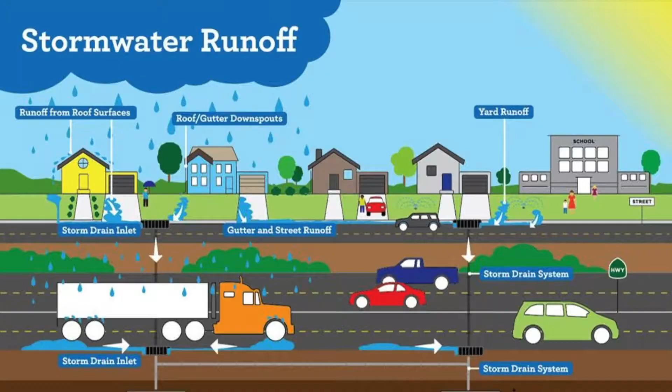Today, this NPDES program requires states to administer an MS4 program to cities, counties, and other local government units who own and operate a storm sewer network, or the Municipal Separate Storm Sewer System, MS4. The MS4 includes all curb and gutter, catch basins, sumps, storm pipes, and stormwater basins in the city. It even covers operations of our stockpiles, pet waste, and winter salting activities.

The main goal of the program is only rain down the drain. This program is really all-encompassing and it requires teamwork across all departments to implement the requirements of the MS4 permit.

In summary, the goal of the MS4 program is to ensure stormwater utilities are functioning and maintained. This is done through inspections and cleanout activities. To ensure construction projects manage stormwater during and after, this is through erosion control inspections, stabilizing our soils, and our stormwater ponds.

To help protect and improve water quality, this is through illicit discharge detection, the only rain down the drain program, street sweeping activities, and our water quality improvement projects.

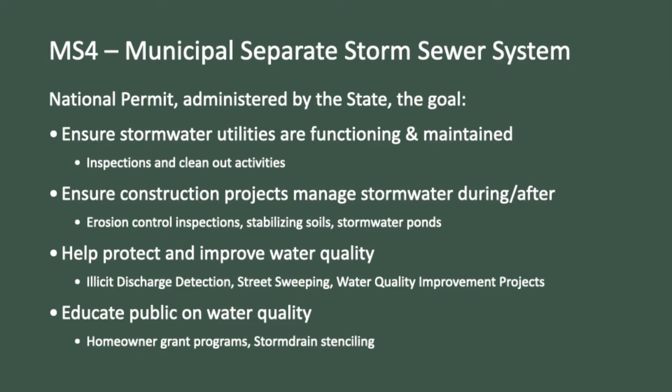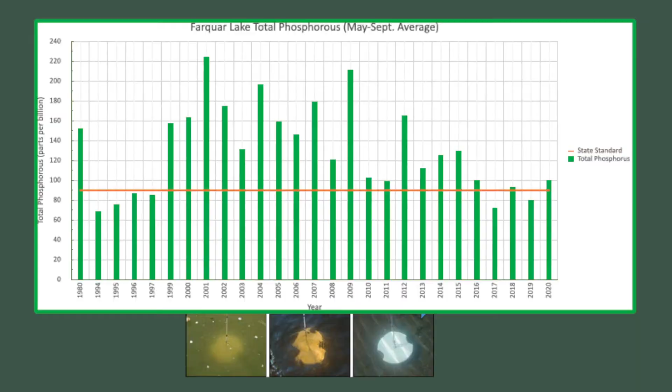And lastly, we like to educate the public on water quality. We do this through homeowner programs, storm drain stenciling, those sorts of things. It's through implementing these best practices we really can have an impact on our water quality. Here we have a graph of Farquar Lake and the improving water quality that we've seen over time.

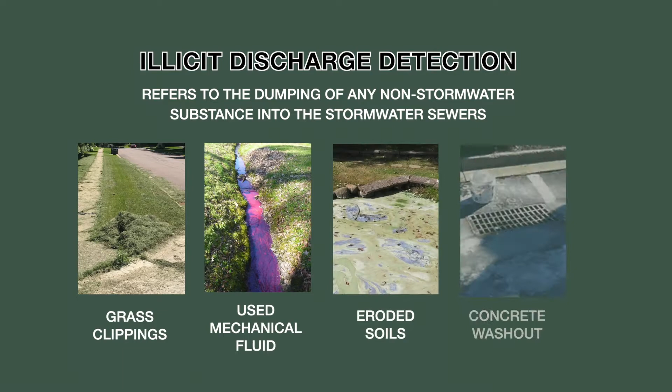So now we're going to be talking about illicit discharge. Sounds interesting, right? Illicit discharge refers to the dumping of any non-stormwater substance into the storm sewer system. This includes grass clippings, used mechanical fluids, eroded soils, concrete washout, and can also include the unlawful connection of a sanitary pipe to a stormwater pipe.

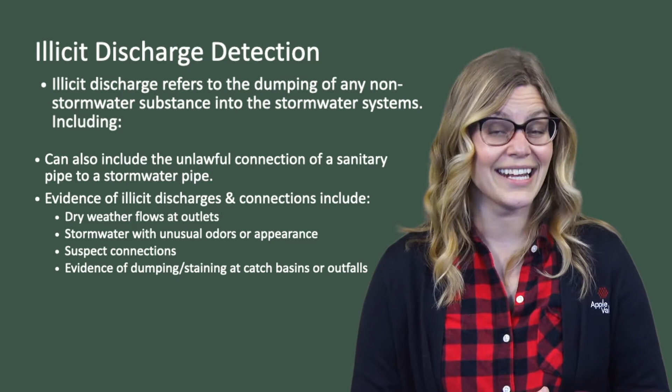So when you're out in the field, evidence of illicit discharges and connections can include looking for dry weather flows at outlets, stormwater with unusual odors or appearance, suspect connections, any evidence of dumping or staining at catch basins or outfalls. So when you're out in the field, your responsibilities will include reporting on these things.

For emergencies, we want you to call 911. Fire also has hazmat training, and fire can handle these ongoing spills with their equipment. They will call in other departments if needed.

Now, during business hours, you're going to want to call utilities. So that's at 952-953-2400. They will also pull in other divisions as needed, and they'll contact the Minnesota duty officer if need be.

These are going to be emergency situations where we've got oil going directly into the lake, or we've got a lot of harmful substances being poured into the catch basin. Those are examples when we want to call the Minnesota duty officer.

Now, if you're seeing some harmless solid substances from residents, such as grass clippings, you can go ahead and call code enforcement or reach out to natural resource staff.

Now, during non-business hours, say you catch something, you're going to want to call dispatch, and that's at 952-322-2323. Dispatch will call the on-call person to get them to come and help.

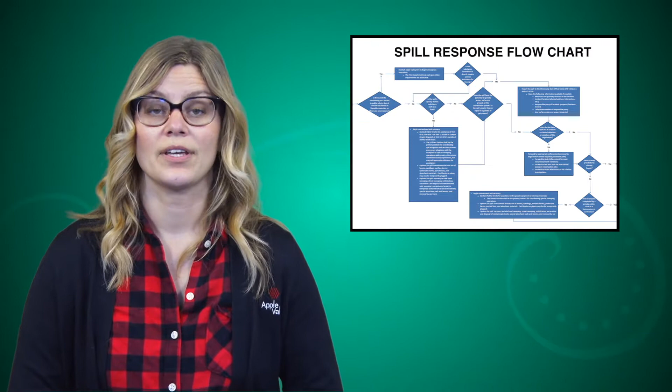Now, if you're sitting there, you've made the call, we really want you to contain those spills if you can while help arrives. Staff have also created a flow chart of illicit discharges, and so we recommend that you bookmark that on your iPad. All illicit discharges must be reported annually as part of the MS4 permit, so make sure you're reporting that information to the appropriate staff.

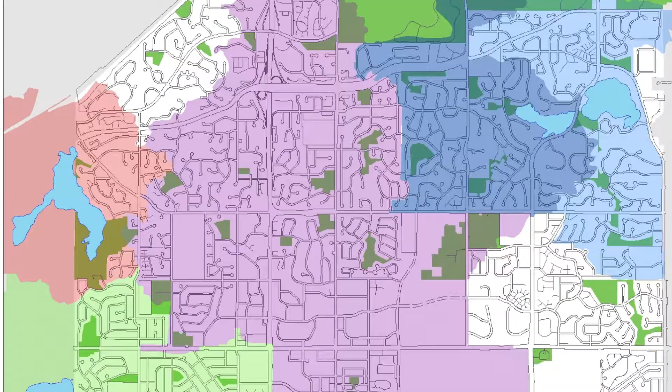The City of Apple Valley has many lakes that are listed as impaired, meaning they are not meeting state water quality standards. Studies known as TMDLs, or Total Maximum Daily Loads, identify sources of pollutants and assign specific pollutant allocations, or waste load allocations, to contributing MS4 permit holders such as cities and counties.

For example, the city needs to reduce an additional 18.4 annual pounds of phosphorus in Lake Alimagnet in order to meet our TMDL goals.

This is actually a 55% reduction in our initial allocation of 30.8 pounds. That's good progress through projects we've installed that have helped reduce the amount of phosphorus entering into Alimagnet Lake.

Measuring water quality plays an important role in managing our lakes and ponds as part of our MS4 system. Natural Resources staff measure different water quality parameters to observe trends in water quality and to determine the effectiveness of water quality improvement projects, such as stormwater ponds and structural pollution devices, or SUMPs, installed by the city.

Parameter measures include water clarity, which is measured with a Secchi disc; total phosphorus, the amount of nutrients in the water; dissolved phosphorus, the amount of nutrients absorbed in the water; chlorophyll A, the level of algae in the water; dissolved oxygen, how much oxygen is in the water; and chloride.

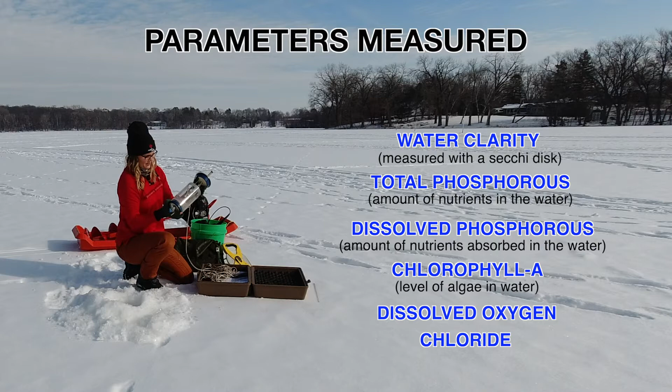Added nutrients from leaves, grass clippings, and pet waste contribute to algal blooms and decrease water quality and recreational activities. This is why activities such as street sweeping and maintaining our sumps and ponds are an important and effective way to improve and protect water quality.

So today we will be taking some chloride samples, and in order to do that, we utilize what's called a Kemmerer bottle. This allows us to take samples at different depths.

First I will be taking a deep water sample. So what we do is just submerge this down. With chloride samples, we want to take two samples, one towards the bottom of the lake and then one towards the surface of the lake. So we just lower this down.

We've got a knot, I'll just do it. Then we use this messenger to send it down, and it actually closes the bottle for us so that we can collect the sample at the depth that we want. So if that went well, we should be able to get our sample. You can see it's coming out here. Open this up. And then we've got our sample at the depth that we want.

Chloride from de-icing salts and water softeners are becoming a big concern for Minnesota lakes. Chloride can negatively affect wildlife and the water chemistry of the lake. Plus, once it's in the water, it's nearly impossible to remove.

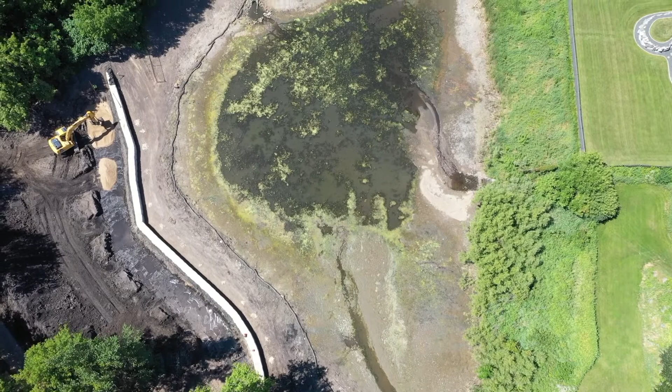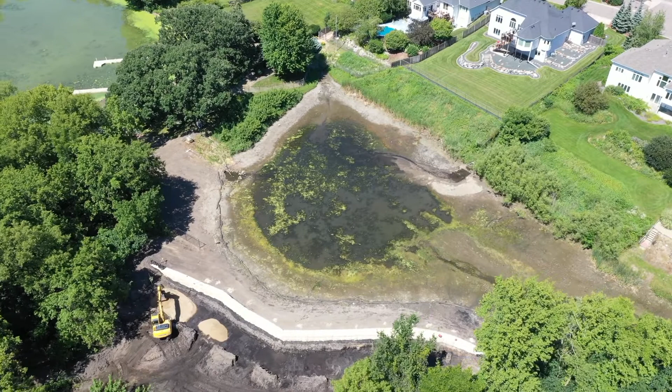A recent example, installed in 2018, is an iron-enhanced sand filter that was installed in Sunset Park, just upstream of Lake Alimagnet. This special iron-enhanced sand actually binds with dissolved phosphorus in the water to remove nutrients before reaching the lake.

Staff actually measured the effectiveness of the system by taking samples of the untreated water and the water treated by the iron-enhanced sand. We know it's working as designed when the nutrient levels are reduced after they flow through the filter.

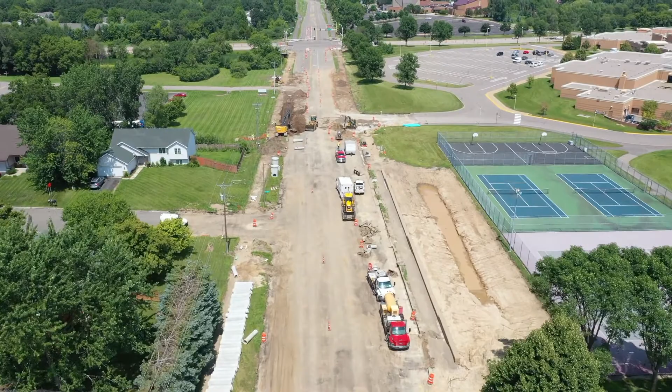Other recent projects include a Long Lake Park iron-enhanced sand filter, stormwater basins installed along Johnny Cake Ridge Road, and the expanded pond at Redwood Park. All these projects were funded through Minnesota's Clean Water Fund, which is part of the Clean Water Land and Legacy Amendment passed in 2008. These projects wouldn't be possible without good planning and partners, such as the Vermillion River Watershed.

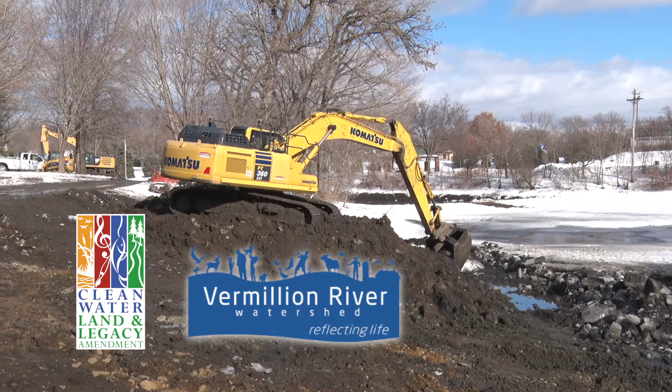We are grateful to utilize these resources when we try to get these projects installed and as we try to meet these water quality goals.

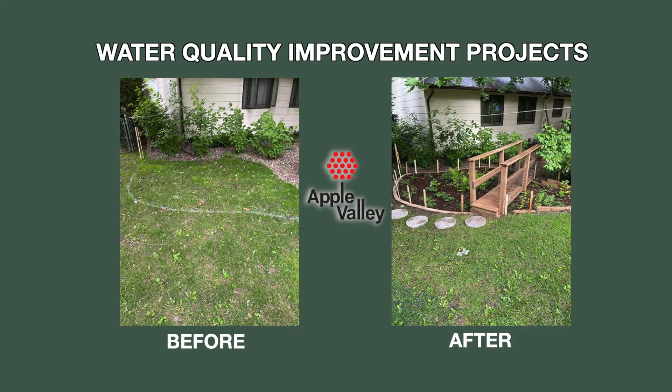In addition to our city projects, the city offers grants to landowners interested in installing water quality improvement projects such as rain gardens, native gardens, or shoreline stabilization projects. This is through our Rainwater Rewards program.

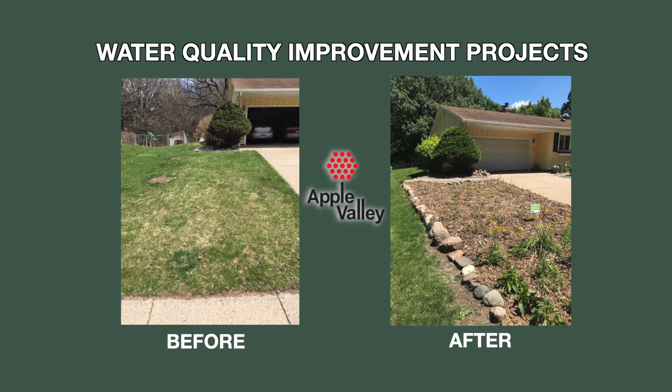Native plants utilized in these projects have long root structures that help encourage infiltration into the soil and provide habitat to our pollinator friends, while also helping to stabilize slopes. The city utilizes buffers around our stormwater ponds because of these benefits.

To manage our city's MS4, everyone, including residents, plays an important role. We thank you for your commitment in helping keep our city great and improving the water quality in our area lakes. None of it would be possible without you. If you have any questions, please don't hesitate to reach out. We know this is a lot of information.

Hello everyone, I'm Mike Endres, the Park Superintendent for Apple Valley. The following is a presentation covering the National Pollutant Discharge Elimination System, or NPDES, as it pertains to the park system. I'll address turf maintenance, dog waste signs, our pesticide and herbicide program, the fertilize program, and stockpiles.

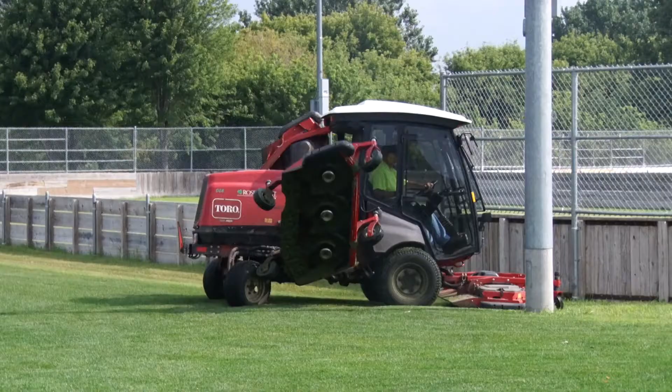Currently, we mow 400 acres of grass. We keep the mower settings at 2.5 inches or higher. Keeping the settings higher means the individual blades of grass have more surface area. This gives the plant a higher rate of photosynthesis, resulting in a healthier plant and root system, also protecting the crown of the plant and giving it better filter capabilities. An additional benefit is the thick, lush lawn crowds out weeds.

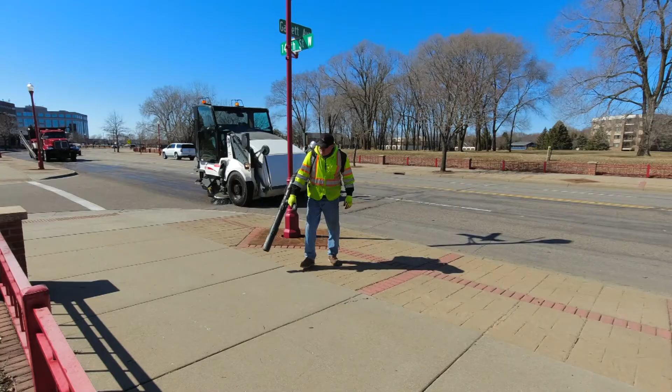We continue to blow off the grass clippings from hard surfaces, keeping them from washing into the catch basins and getting into the holding ponds. This should be an ongoing practice for individual homeowners as well.

We daily clean off mower decks, keeping any residual clippings from getting onto the hard surface areas. The clippings themselves are a benefit to the existing stand of grass. The composting clippings break down, providing nitrogen, potassium, and phosphorus. The key is to mow often, preventing clumping. Sharpening mower blades often also is a benefit to keep the turf healthy. It helps prevent damage to the individual blades of grass with a clean cut, not creating a shredding effect.

Currently, we have pick up after your pet waste signs at Hayes, Belmont, Greenleaf, Faith, Diamond Path, Cobblestone, and Cedar Isles. The key to the success of this program is for the general public to be active participants and follow the ordinance.

Currently, we have 5 staff that have certified pesticide applicators licenses. Our application of pesticide is very minimal. In the past couple of years, there has been a lot of hype to treat for Japanese beetles. We've treated some trees in the past and found it didn't seem to make any difference. Now we have learned that it's not worth the treatment because the trees can withstand the infestation and don't run the risk of killing pollinators.

Our herbicide program is contracted out for weed control. 95% of the system is covered by the contract. We will spot apply in areas not covered in the program only if needed. We do apply preen to some of our plant beds to control weeds.

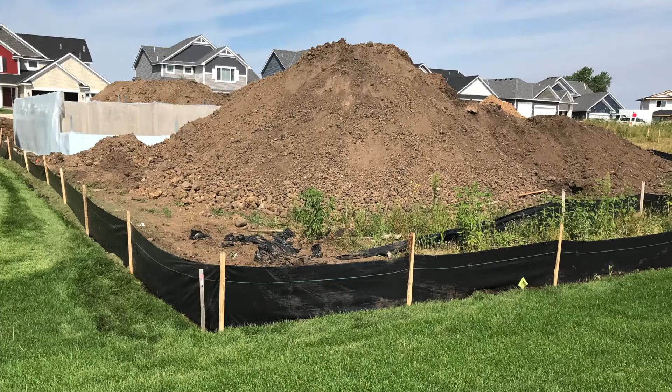Next would be diversion. Can we divert the flow of water around open soil or stockpiles so that erosion never occurs? After this, we have cover.

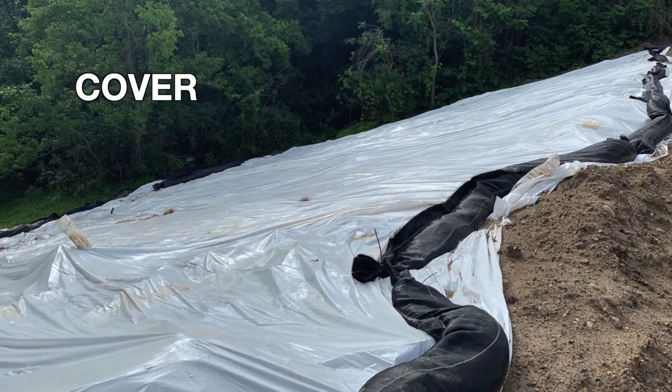Every permit I issue states that stockpiles should be covered when not in use, with a tarp or straw. Temporary stabilization is also a good method of cover, such as winter barley or straw.

My next method would be contain. We can keep materials out of the storm drain by installing inlet protection devices, and we can also contain loose sediment by installing perimeter controls such as silt fence and biologs to keep sediment on the project site. So next we have slow.

We can slow sediment down with rock checks and hay bales. This is for areas where we know there's going to be some sort of flow from the site.

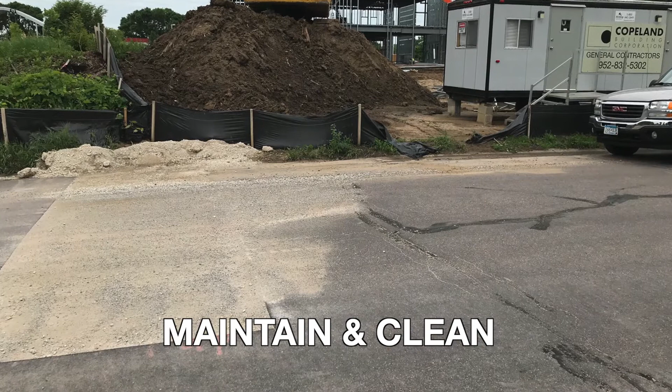Following, we have maintain and clean. This is one of the most important and often overlooked aspects of erosion and sediment control. Once these best management practices are in place, we need to continually check to make sure that inlet protection devices are emptied when half full and silt fence or biologs are repaired when needed.

And finally, we've got stabilize. Once the earthwork has been completed in the project area, the bare soil should be stabilized either with straw blankets, hydro mulch, or sod. 70% of cover needs to be established to meet these minimum requirements.

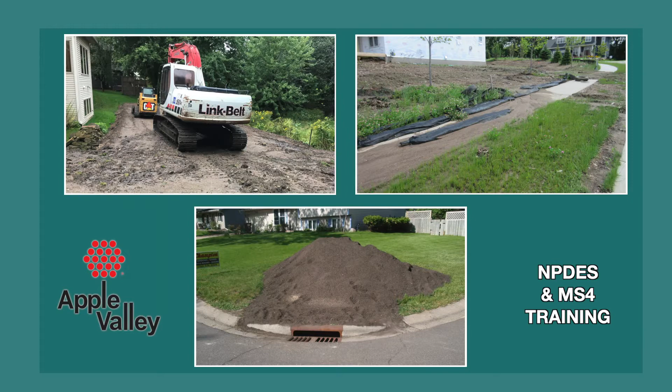So in conclusion, if you see any problems when you're out driving around, any track out or silt fence down, bare stockpiles next to a catch basin, feel free to give me a call. I'm at 952-953-2464.

Hi, I'm Jeff Wright and I work for the Fleet and Building Maintenance Division. I'm here to talk about the city's spill reduction and response plan.

The city has a spill reduction and response plan implemented, which consists of spill kits, floor dry, along with preventive maintenance for all our equipment. The spill kits include Hazorb rags, Hazorb pillows, and Hazorb snakes to help dam up and absorb the spills and keep it from running down the curb gutters to a catch basin.

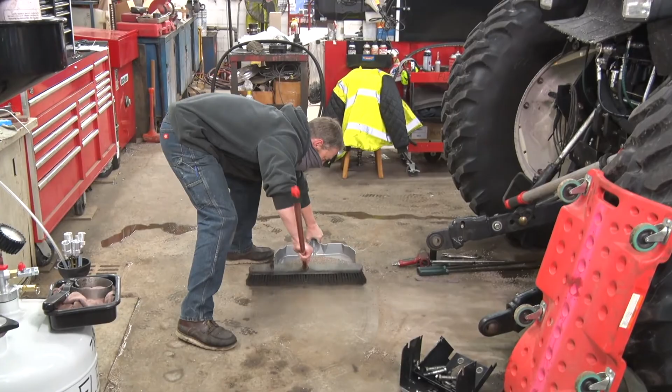The floor dry is another way to help absorb and clean up spills on the roads and the shops. When used, always make sure and sweep up the floor dry and bring it back to the shop and dispose of it into the used floor dry barrels.

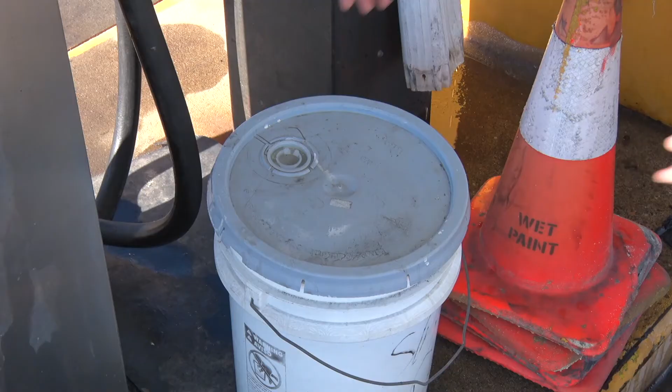The spill kits are located in a few different places: the big plow trucks, the foreman's trucks, the CMF fuel pumps in a 5-gallon bucket with a cover on it. And we also have a bulk storage of those up on the mezzanine above the fleet offices.

The barrels of the floor dry are located in the fleet bay, streets bays, and parks maintenance bay. The same areas also have the designated barrels you can dump the contaminated floor dry and used Hazorb rags into. You can mix them all in one. When full, we seal it and send them out to get recycled.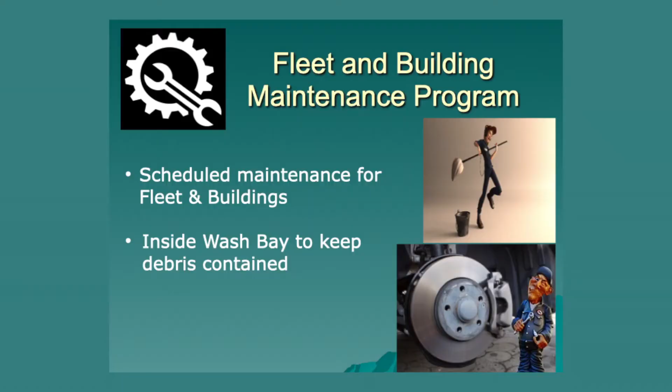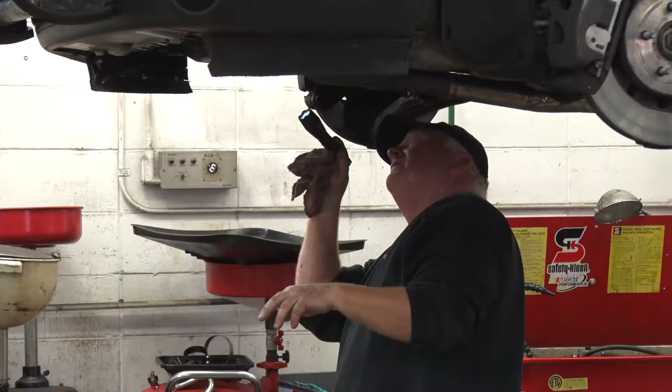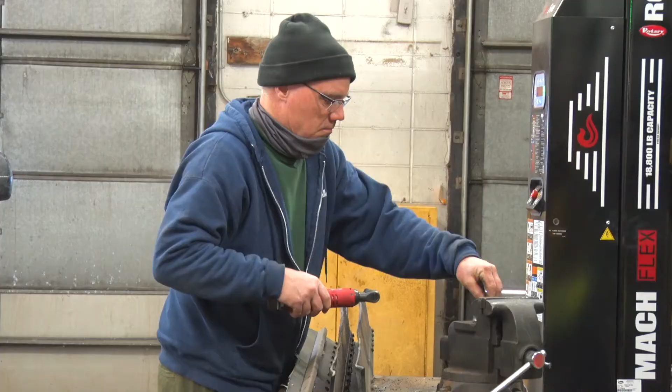The fleet and building maintenance program that we have helps reduce the chance of hazardous spills. We do a scheduled preventive maintenance on all our equipment. During these preventive maintenance checks, we look over the whole piece of equipment, looking for potential wear that could cause a breakdown such as blown hydraulic lines or coolant lines, etc. When found, fleet staff will repair or replace the worn items before it has a chance to fail and cause a spill.

CMF also has a wash bay that keeps debris and contaminants contained inside and is on a regular schedule to clean out and dispose material properly.

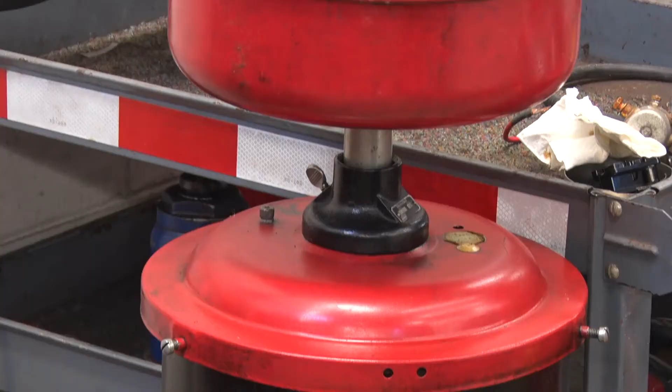Another thing I want to talk about is the hazardous material storage and recycling areas. The city recycles all its hazardous waste material, some with recycle machines we have in-house, and the rest from an outside licensed vendor. The items we recycle include used tires, used oil and antifreeze, Freon, used batteries, used aerosol cans, reusable shop rags, cleaning solvent, and fluorescent bulbs.

All these items are collected and stored in labeled containers at CMF in the fleet maintenance shop area, except the fluorescent bulbs, which are stored over at the central receiving bay on a designated shelf. If you have any questions on the spill reduction and response plan or the hazardous waste storage, please get a hold of one of us in fleet. We'll be happy to help you out.

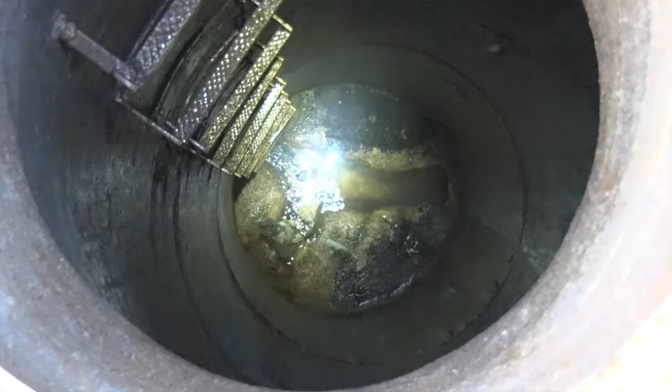Today we're going to be going over the National Pollutant Discharge Elimination System. One of the items we're going to be talking about is sanitary sewer maintenance. This is important to make sure that we clean all of our sewers and do not have overflows going into the storm catch basins. The first item we're going to go over is the sanitary sewer maintenance.

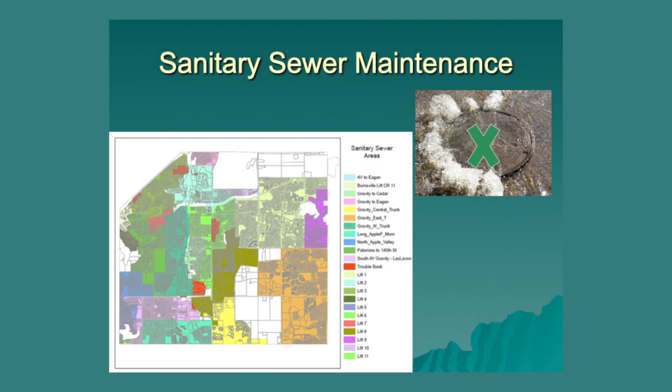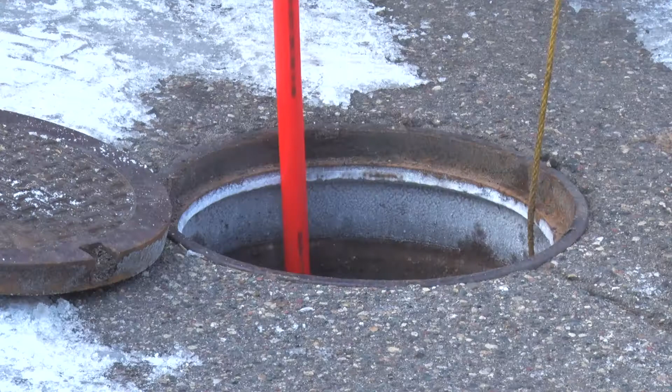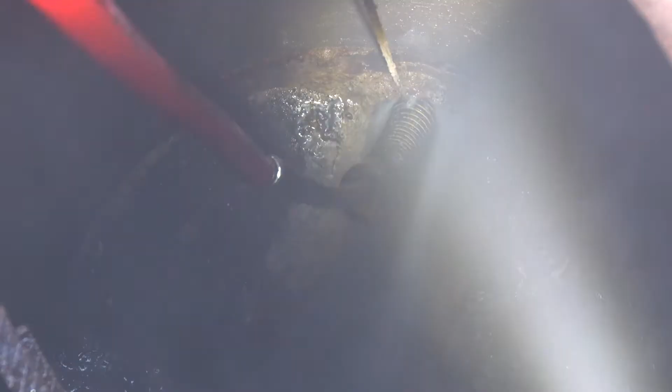We clean all of this clay pipe sewer every other year. So citywide, no matter what year it is, we clean at least half of the clay sewer pipe every year. We also clean the clay pipe and PVC every 4 years. So in combination, our goal is to clean all clay and PVC pipe every 4 years.

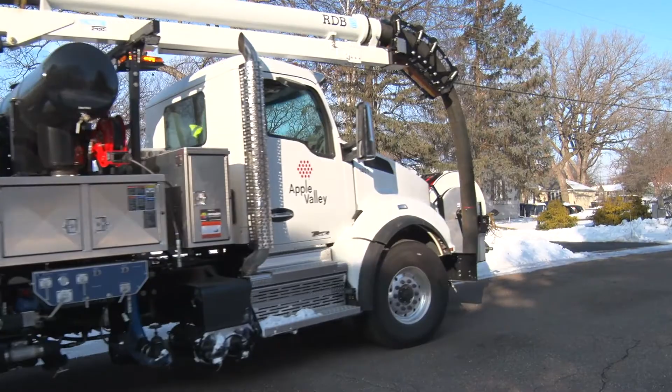We clean the spring and fall cleaning areas every year. These may include opportunities like our commercial restaurant district, where we may have a little extra grease. Those are some of the areas we might clean every year. We also have some areas that we've had problems with the pipe itself, where it maybe has sagged a little bit, and those areas we also clean every year.

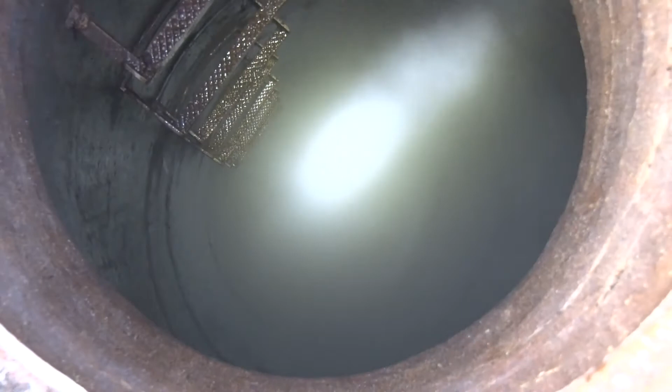We clean a total of 67 miles of sewer every year, and that's average. With COVID, we did clean a little less sewer, but we did take on a new product called the SL-RAT.

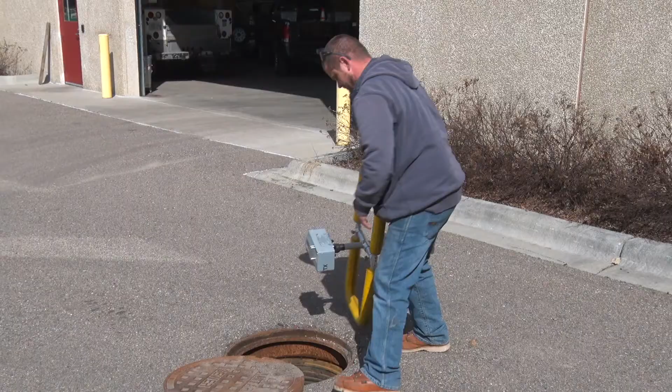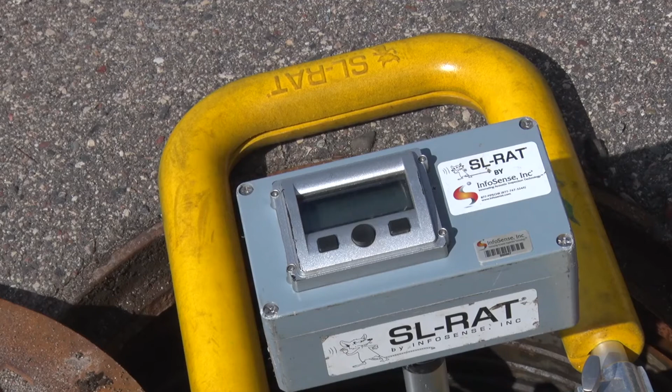The SL-RAT is an acoustic monitoring device, and what it does is it allows us to get a rating on a sewer pipe section. So if we've got one sewer pipe section from one manhole to the next, we can put down a transmitter and a receiver. It takes into consideration the distance of pipe and the diameter of pipe, and then it sends a tone sequence through the pipe. The receiver tells us the amount that it received, and therefore it gives us a rating on that pipe section.

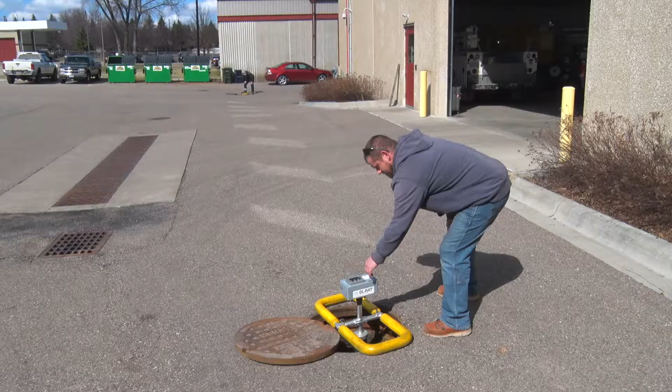So by doing so, we can get an idea if it's got a lot of blockage in it, if it comes with a 3 or a 4 rating, or a 2 or a 0. We know that we have to go out and clean that pipe section immediately. So this is something that we are taking on and using in our PVC pipes.

We have a total of 200 miles of sanitary pipe in Apple Valley. There is a combination of VCP, vitrified clay pipe, and also PVC, polyvinyl chloride. The polyvinyl chloride is from more recent years. It is much easier to maintain. It does not stick as much to the pipe, grease-wise. It still does stick, but not nearly as bad as it does to the clay pipe.

Clay pipe is no longer installed in most cities. We don't ourselves use it any longer. However, some of the older cities have decided to continue to use clay pipe.

The sewage in Apple Valley is not treated in the city of Apple Valley. So when you're driving around the city of Apple Valley and you see a water treatment facility, it is the drinking water treatment facility, not the sewage.

The sewage is actually sent to 2 different plants. Part of the sewage goes to the Seneca wastewater plant in Eagan, Minnesota. The other is in Empire, Minnesota, referred to as the Empire Wastewater Treatment Plant. We have a lot of piping that brings that water to those particular plants. So we do not have wastewater treatment in our city.

Now I'd like to talk to you about storm sewer maintenance.

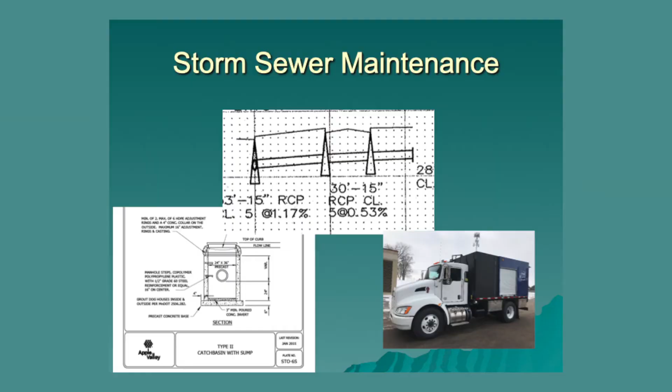There are 1,958 sump catch basins in the city of Apple Valley, and there are 173 miles of storm sewer.

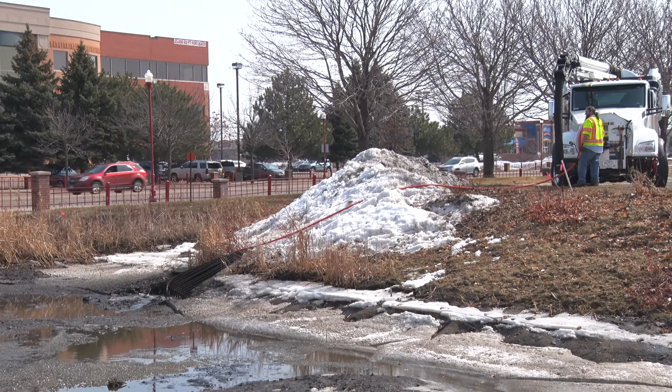These different storm sewers connect our lake system in the city of Apple Valley. As you know, we do not have any creeks or rivers to connect our system, so we have our sump catch basins, which pull the debris out of our pipes before it gets to our ponds and lakes.

The pipe that comes into the catch basin has a sump basket under it. That pipe catches the debris as the water slows down. As the water flows in, it comes into the catch basin basket, which slows that flow down, and then as it leaves out the exit pipe, it has dropped a bunch of that debris.

Once we slow that water down, the debris drops out, and that allows cleaner water to head into the ponds or the lakes. The sump catch basins catch the debris that would have gone to the storm ponds.

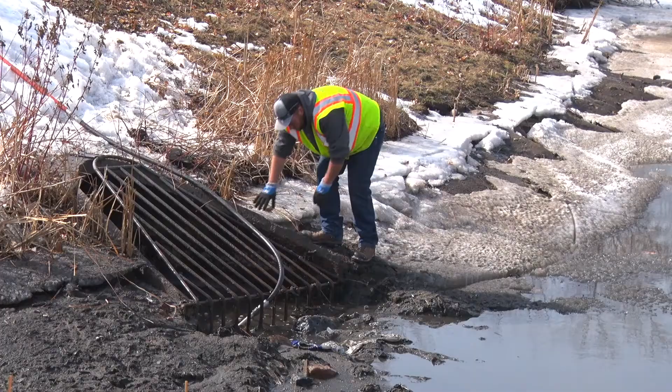All of the sumps located on major roads are vacked out with a combination truck every year. The sump catch basins located at residential roads are cleaned every other year.

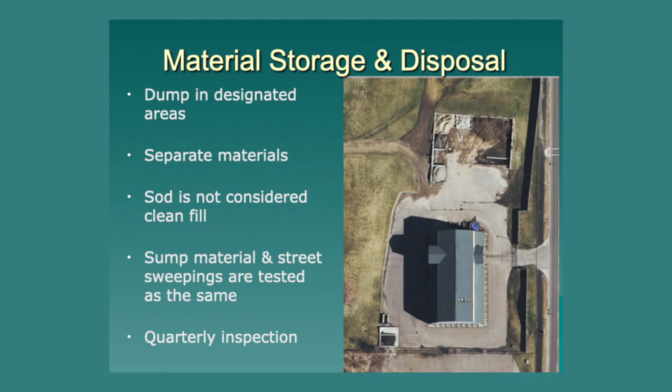The next section I'm going to talk to you about today is material storage and disposal. The dump pad located just north of the salt storage building has designated dumping areas. Make sure that the material you put into that dump pad is in the correct site. We have a couple of different areas.

We have our clean fill area, and most of that comes from our water main breaks during the wintertime. We'll have the dug up, very saturated water with the clay or sand or whatever happens to be in the hole, put into that site.

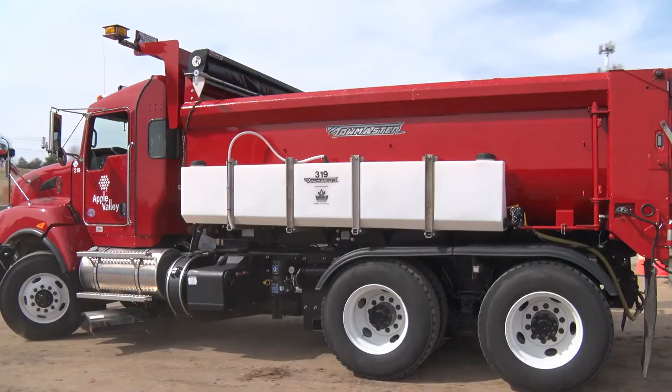Another site we have down there is designated as the sweeping site. We've got all of our street sweeping material that gets put into that site.

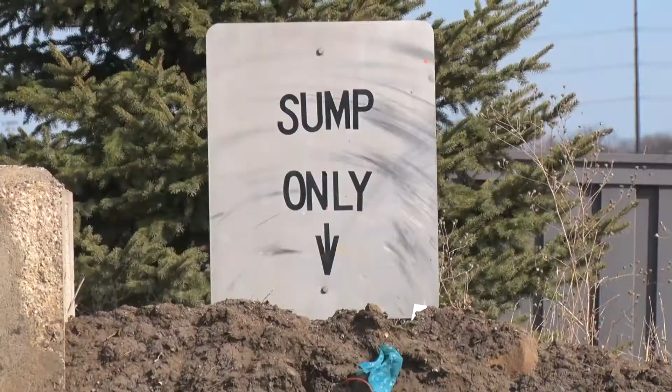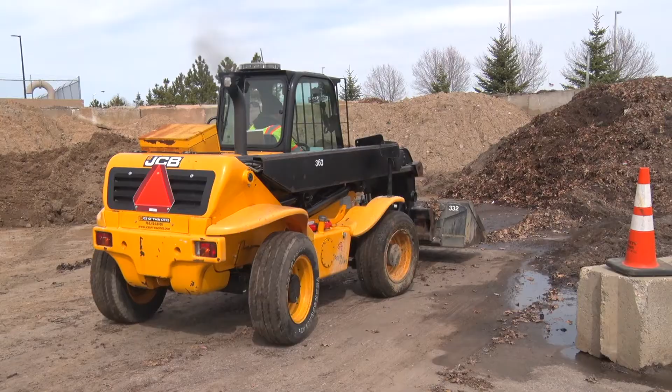We have another site down there designated as the Vactor dump site. When our crews are out vacuuming the sump catch basins, the material is very wet and ends up getting put into that site, which allows the water to drain off and the solids to settle out so we can push those solids up onto the pile.

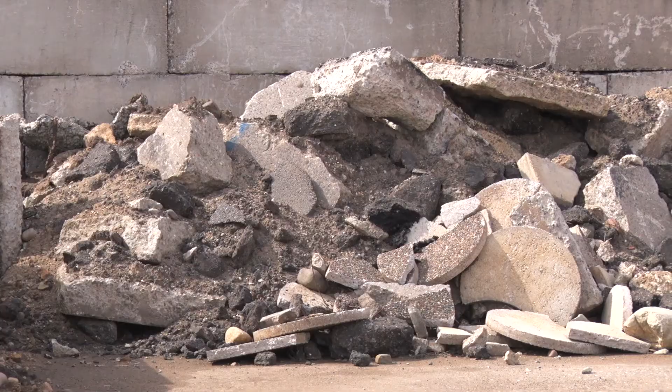Another site we have down there is for concrete. Anytime we're pulling any curb sections or sidewalk out, we would dump that in that concrete dump bin. The other bin down there is for asphalt. Anytime we have any kind of asphalt that we're pulling up, whether for a water main break or something else, that is to be designated and poured or dumped into that site.

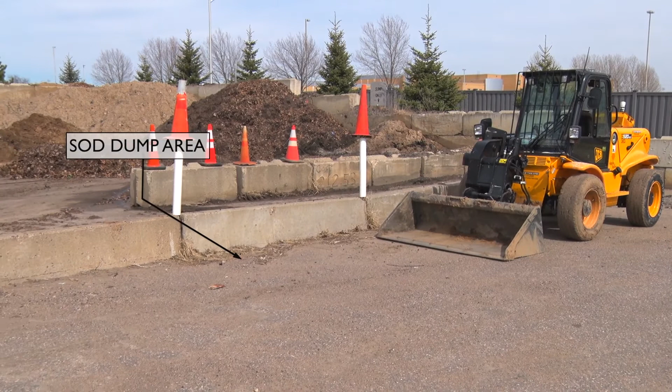The sod is not considered clean fill. Anytime we have to cut out some sod to do repairs or so on and so forth, we need to get rid of that in its own pile so it can be designated or hauled off to a sod site, and not as clean fill.

The sump catch basin waste and the street sweepings are disposed of as the same type of waste. The main reason we separate them is just to get the water to drain off from our sump catch basins, and then ultimately they get stored or piled together.

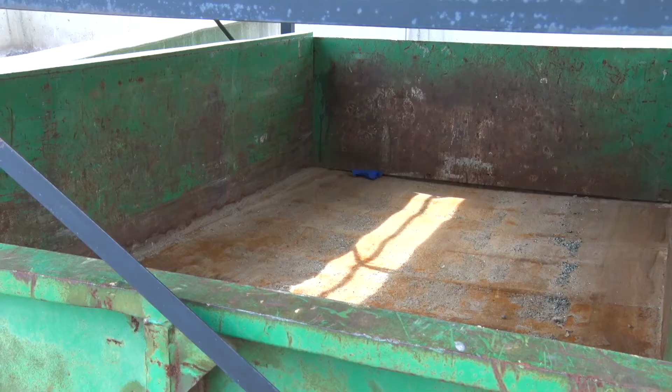The sanitary sewer material is dumped into the dump area just southwest of the salt storage building. The material is dried out and then dumped into the special waste dumpster. A new cover was fabricated to keep the rain from mixing with the special waste and entering into the storm sewer system. So what we're talking about there is the sanitary sewer waste.

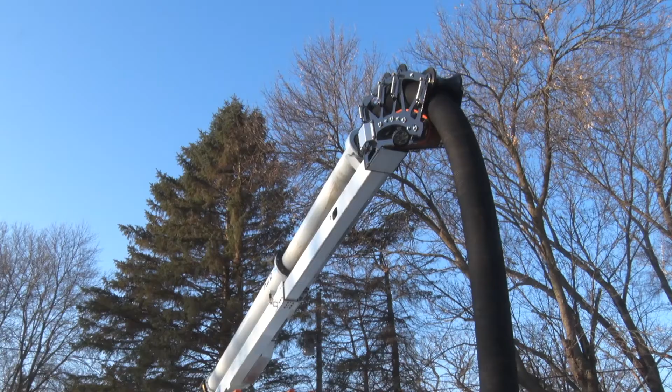When we go out and clean sanitary sewers, we vac up a lot of material and bring it back to the shop. We dump that into that area. We allow the solids to settle out and the liquids to enter back into the sewer system.

Once those solids have been dried out enough, we have a special waste 10-yard dumpster that's also down next to that site. We then scoop up all the material, bring it over to the special waste dumpster, and dump that into the special waste dumpster.

We then pull the cover back over the top of the special waste dumpster, so we keep rain from entering the dumpster and then ultimately coming down into the storm sewer catch basins.

Our last area that I'm going to be talking to you about today is the wellhead protection and drinking water supply management area, or DWSMA.

The wellhead protection area is a vulnerability area rating around our wells inside the city of Apple Valley. Inside the city of Apple Valley, we have 20 wells. Of the 20 wells, one of them is currently pulled, well number 16.

Wells 1, 2, and 3 do not come to the water treatment plant. They are emergency only wells, as well as wells 14 and 15, which are in a different aquifer. Wells 14 and 15 are in the Mount Simon Hinckley aquifer, which is much deeper and regulated by the DNR, and we do not pump out of it unless there's an emergency. The rest of the wells are in the Jordan aquifer.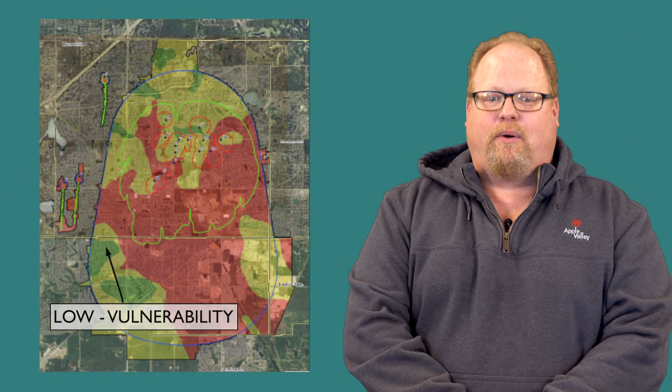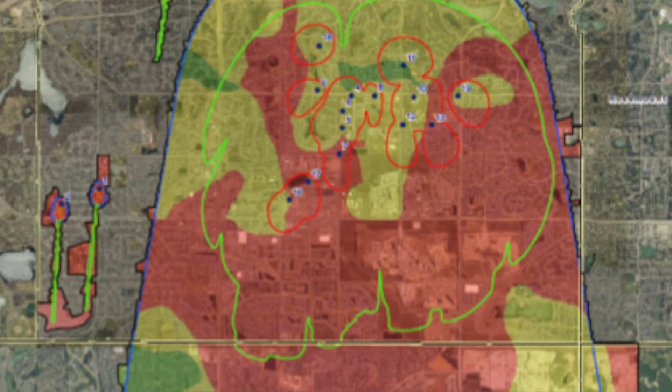The green area on our map is low, the yellow area is moderate, and the red area is high vulnerability. That delineates the different vulnerabilities we have in the city of Apple Valley. The red penciled-in area is an emergency response area, considered a 1-year emergency response area. The green is the 10-year Jordan Aquifer Wellhead Protection Area. The blue penciled-in area is the Prairie du Chien Aquifer Fracture Flow Wellhead Protection Area.

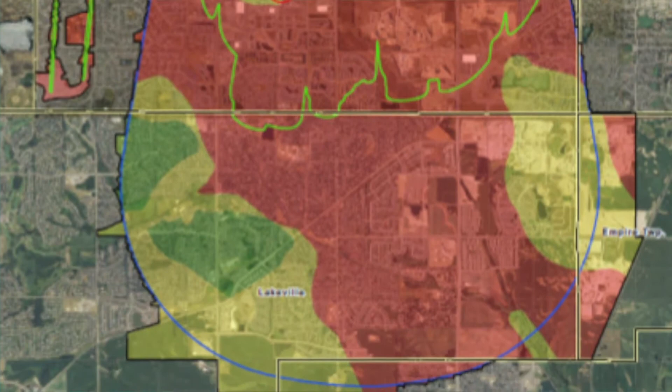So today we've talked about the sanitary sewer maintenance, storm sewer maintenance, material storage and disposal, and also our wellhead protection plan and our drinking water supply management area. If you have any questions about any of these things, I can be reached at 952-953-2442. Again, my name is Kent Zimmerman.

Hi, this is Scott Werner, Supervisor with the Apple Valley Streets Department. Today we're going to talk about our salting and anti-icing methodologies.

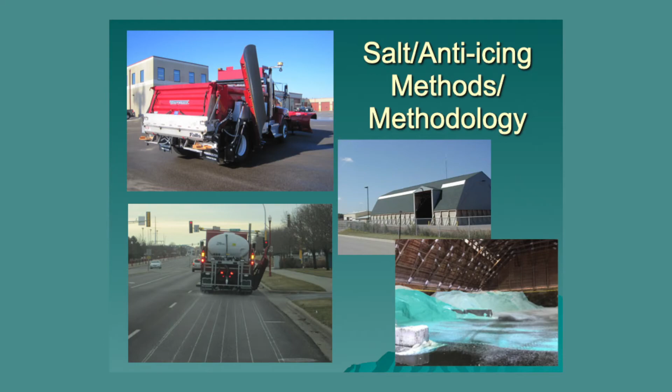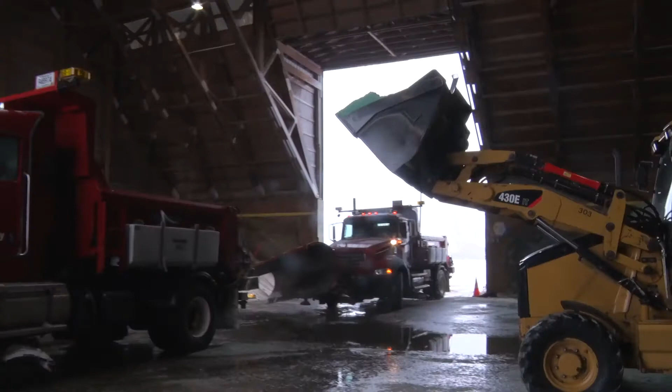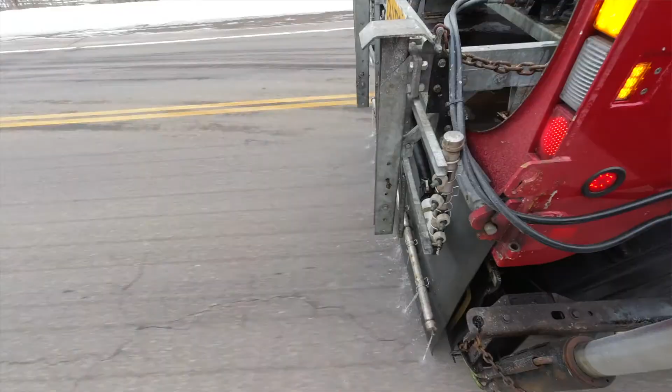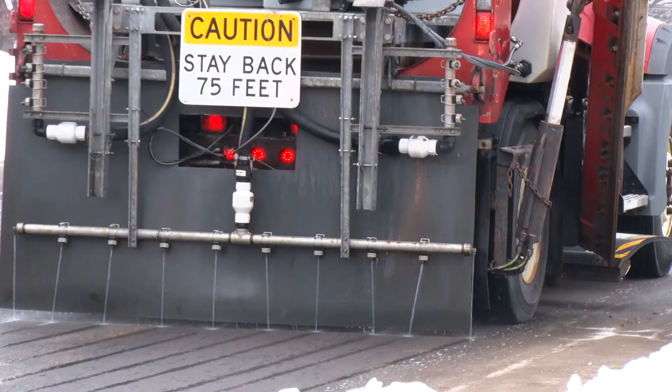In the winter season of 2019 to 2020, we used 1,603 tons of salt. This was down from the previous year based on the amount of salting and snow plowing events we had. On a yearly basis, calibration is done to both the sanders on the trucks and the anti-icing unit. The anti-icing unit is used whenever possible to reduce salt usage, which helps prevent the bond between pavement and snow and ice. We also pre-wet our salt at the spinner to activate it faster and help it adhere to the road surface. The 3 products we currently use are salt brine, AMP, and Apex.

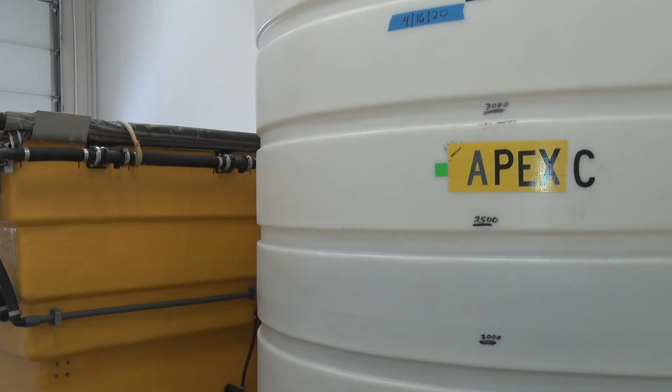Salt brine is used when it's 20 degrees or higher. AMP is used between 10 and 20 degrees, and Apex is used at 10 degrees or below. To scrape as much snow off the roadways as possible, we've purchased Joma cutting edges for the underbody plows. This product flexes to the pavement to remove the most snow before applying salt. All products applied to the roadways are tracked using our precise AVL. This can be per truck, per route, and we can create geofences if needed.

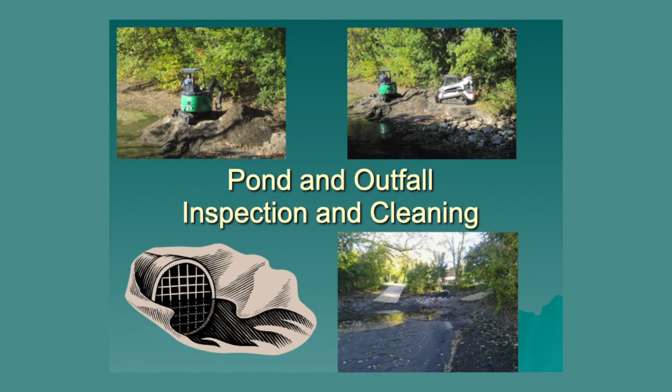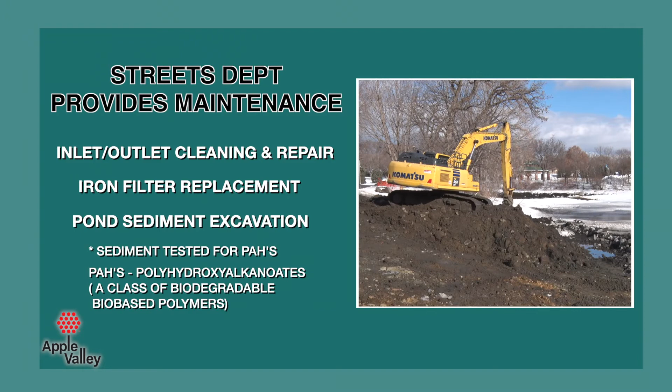Now I want to talk about pond and outfall inspection and cleaning. Natural Resources does the inspection and creates a list that prioritizes maintenance for the Streets Department. The maintenance the Street Department handles includes cleaning and repairing inlets and outlets, iron filter replacement, and pond sediment excavation. When pond sediment is excavated, it's hauled back to CMF so it can be tested for PAHs. After the tests come back, the pond sediment is hauled to SKB Environmental for disposal.

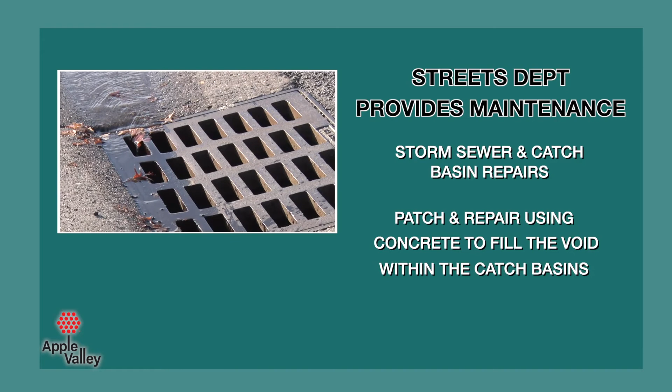The Streets Department also takes care of storm sewer and catch basin repairs. This involves patching and repairing with concrete to fill voids within the catch basins, or replacing the rings. Lastly, I want to finish up with the Apple Valley Street Sweeping Program.

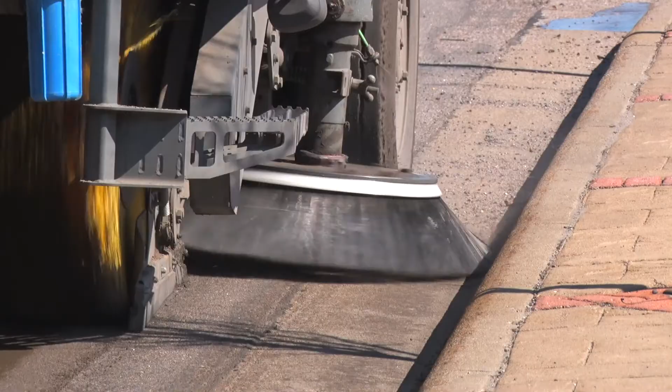With the Street Sweeping Program, probably the biggest impact is the removal of debris from the roadways. In the spring of 2020, we removed 505 tons of debris. We removed 682 tons of debris in the fall of 2020. This was done with 2 rounds of sweeping, in the spring and the fall.

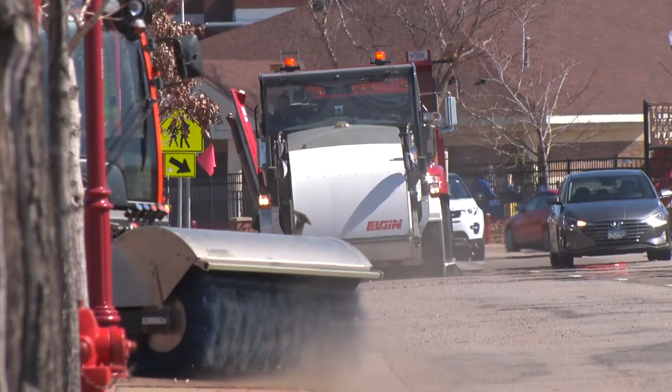Typically, we start mid to late September and try to finish before the snow starts to fly. Throughout the summer, we typically have a sweeper out on a weekly basis sweeping the streets. The sweeper we use is our regenerative air sweeper, which is better at picking up fines because of its vacuum head. Typically, this is done 6 times throughout the year.

Along with our sweeping program, there are 4 intensive sweeping areas that we try to sweep at least 4 times per year - twice in the spring, twice in the fall, and throughout the year. These areas are Long Lake, Farquar Lake, Keller Lake, and Alimagnet Lake. All these areas are swept with our regenerative air sweeper, which has the ability to pick up smaller fines because it has a vacuum head pickup rather than our conventional sweepers with a broom.

That's our program. If there are any further questions, feel free to contact myself or Jeff Lathrop with the Apple Valley Streets Department.